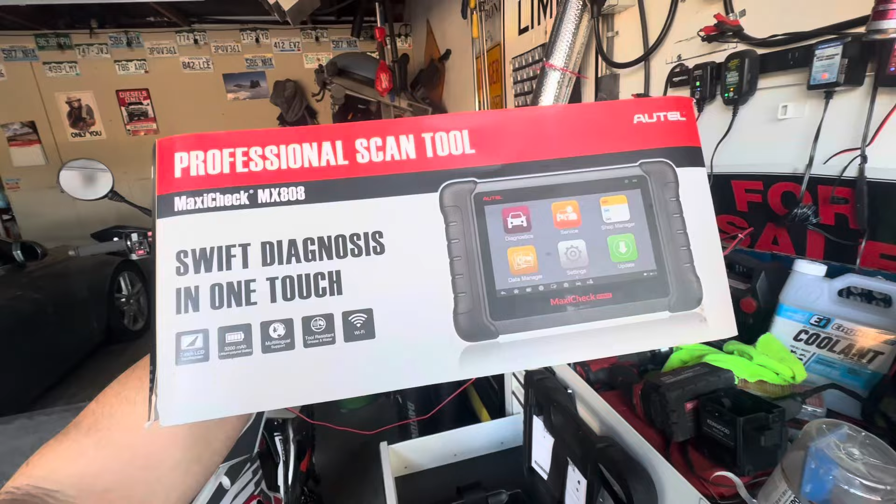This is not a video about the car, but anyway, I was just letting you know, if you have one of these cars and one of these scan tools, you can go in and change your service mileage, so you don't have to have the warning come on.

At 7,500 miles, after you've used it for 7,500 miles, you can drop it down to whatever you want. You can do it every 1,000 miles if you're driving race cars, or you got it souped up, or you got a big turbo on it and want to change the oil sooner. You can go in there with that scan tool and set it.

So it's pretty cool. Kid bought that scan tool for me, I don't know, about 5 years ago, or maybe even more.

Anyway, video is about pulled pork. Man, we didn't get to eat till dang near 10 o'clock last night. Just couldn't get the heat going, the heat just wouldn't stay, it stalled out on me.

Sorry, I went into a guy at work's voice. Anyway, it was just super windy. I think even still the wind was pulling the heat, it just stalled out on me, so I ended up turning it up to 300 degrees.

It hardened the outside way too much, almost kind of burnt it, but the inside was delicioso. Anyways, it was good regardless.

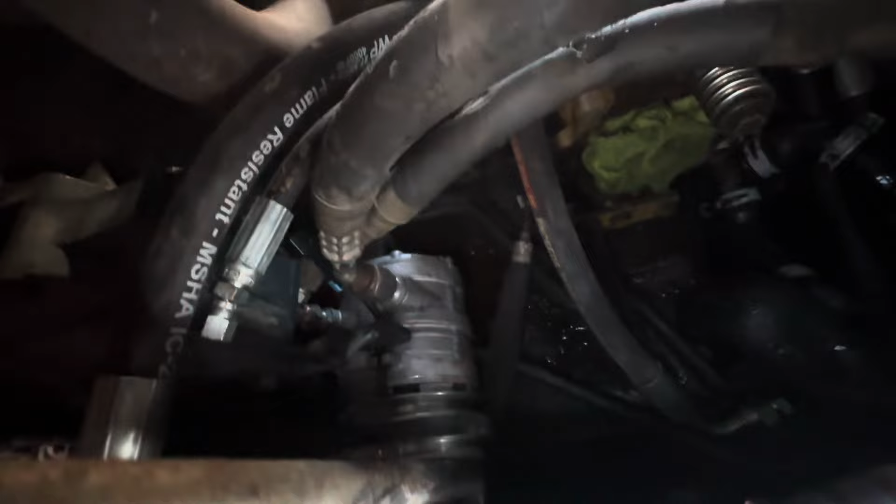Okay, so it's gonna be hard to see in here, but we got the pump out. I got pretty much all the lines capped off with a cap kit, other than the fuel. That's a fuel return line.

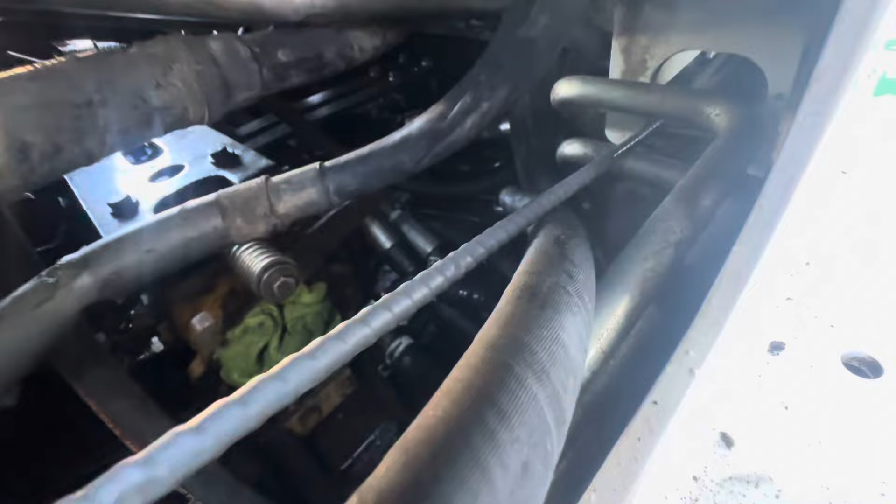That was not fun. I do have a plan to get it in a lot easier than it took to take it out, so I'll show you guys that at the pump. I wish I would have done it, so if I have to do this again. The most difficult part is the clamps, the stupid hose clamps that are dumb.

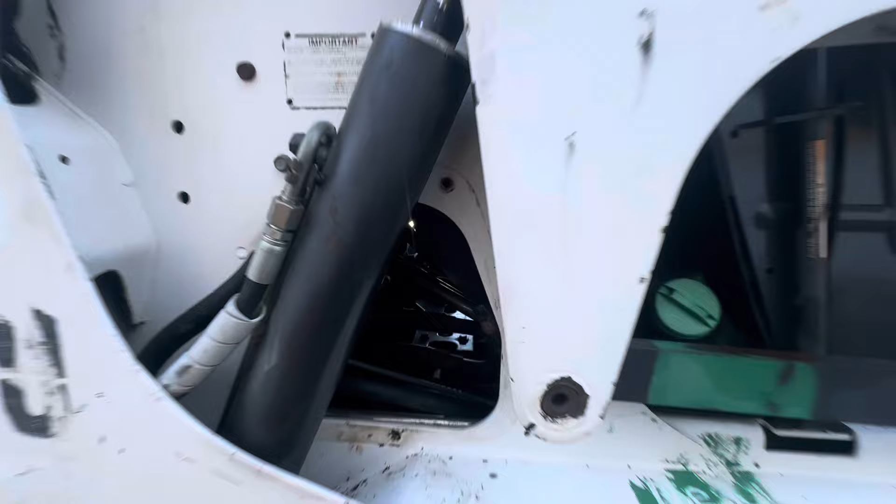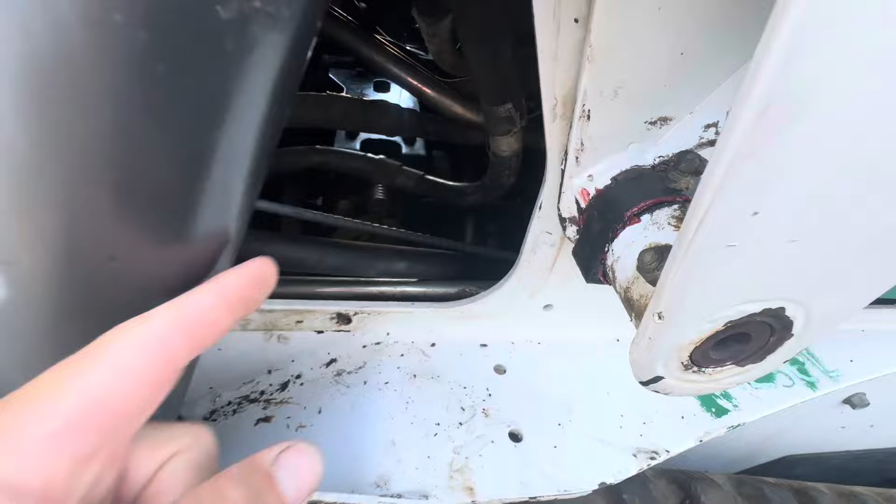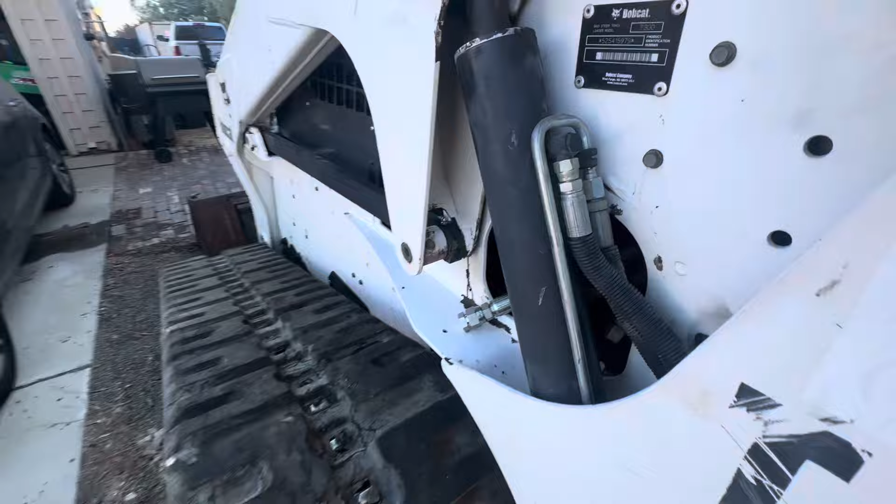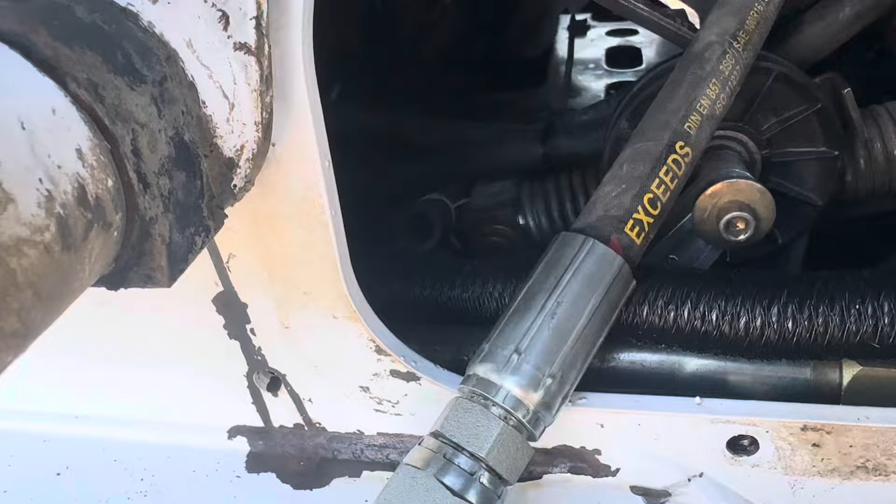I did reroute the heater hoses up there. I rerouted them over there because whoever worked on it before had them going down here and then up. But I think I'm gonna have to get new hose because there's some worn stuff on it. As you can see, I got that cap on there, got that cap on that hose, and there's a cap on the other side of the hose. I don't remember what that hose is for.

Anyway, yeah, not fun, not fun at all. But I did find chunks. I think I already did a video of all the chunks, but let's go over here.

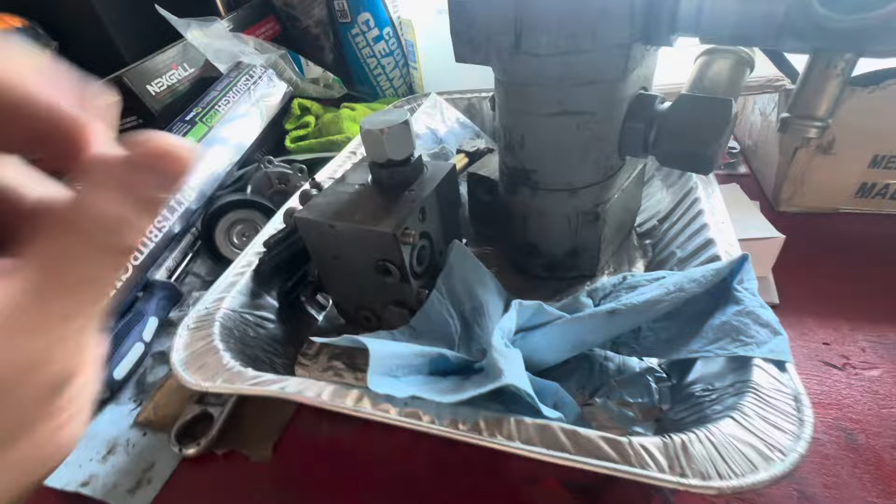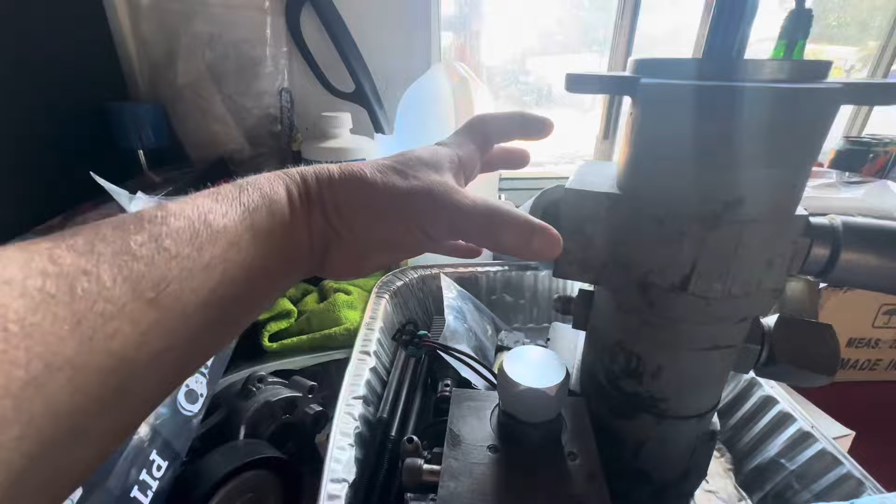So basically this is the pump, and then this is the front attachment block. Now that I know this comes off, this pump will go in a lot easier because I could throw the pump in and bolt it in, because one of these bolts sits behind this block and you only get a quarter turn at a time. So now I could just throw it in and do all that.

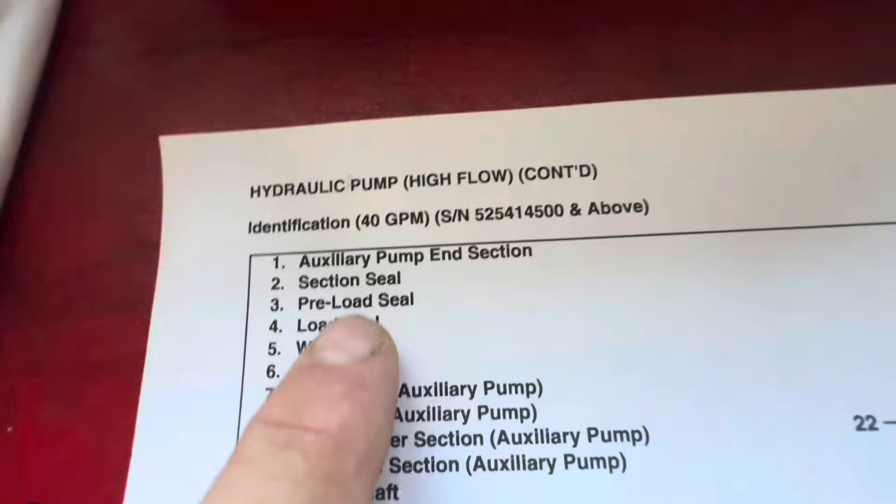So I was trying to order this pump. It's a high flow, 40 gallon per minute. That's the serial number of the machine and above.

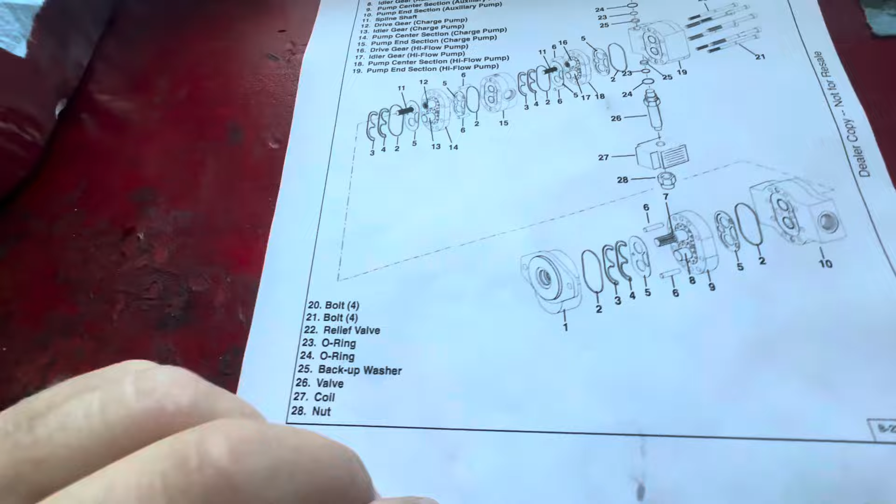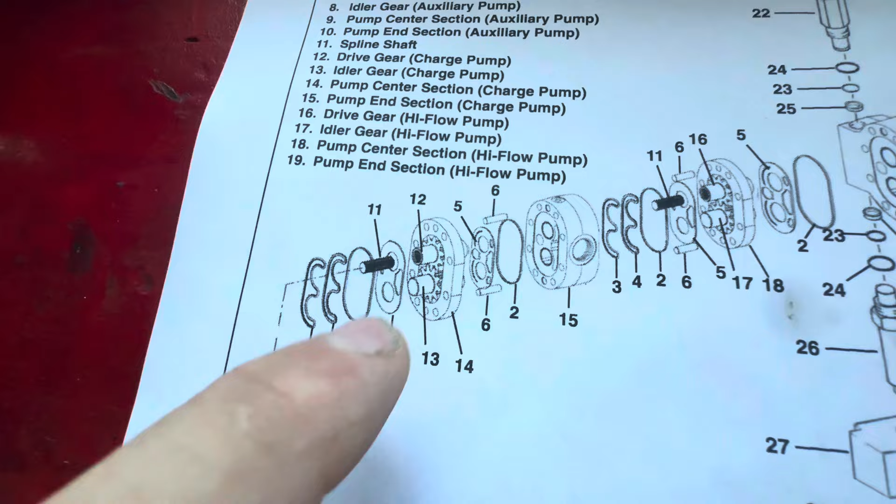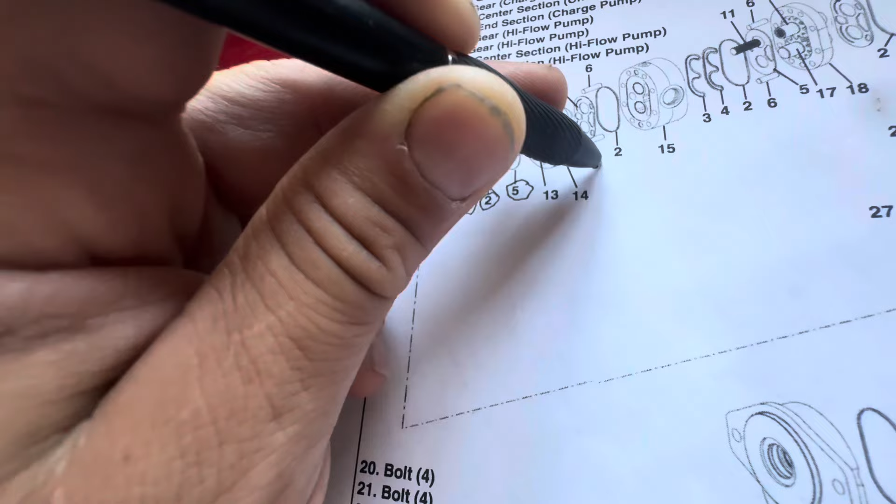Basically what I'm trying to order is 14, which is this whole piece, not the gears, 5, 6. I wish I had a highlighter, but so I'm trying to order this. This is gonna be left-handed. 3, 4, 2, 5.

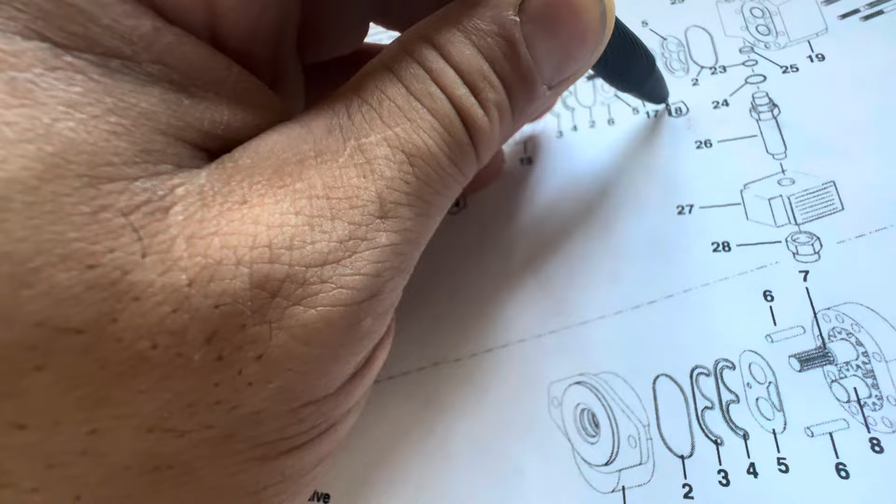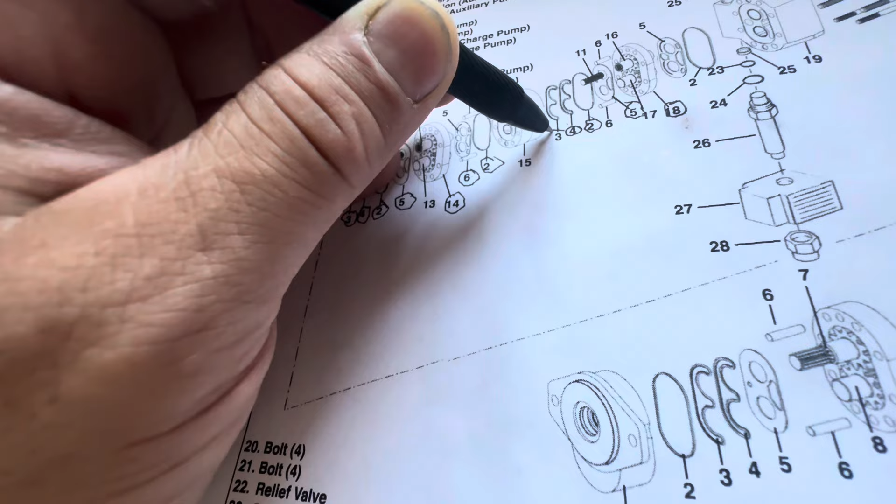6, 2, 14, 18, another 5 - those are good - another 2, another 4, another 3, 5. And I'll tell you guys how much this is, how much money this is.

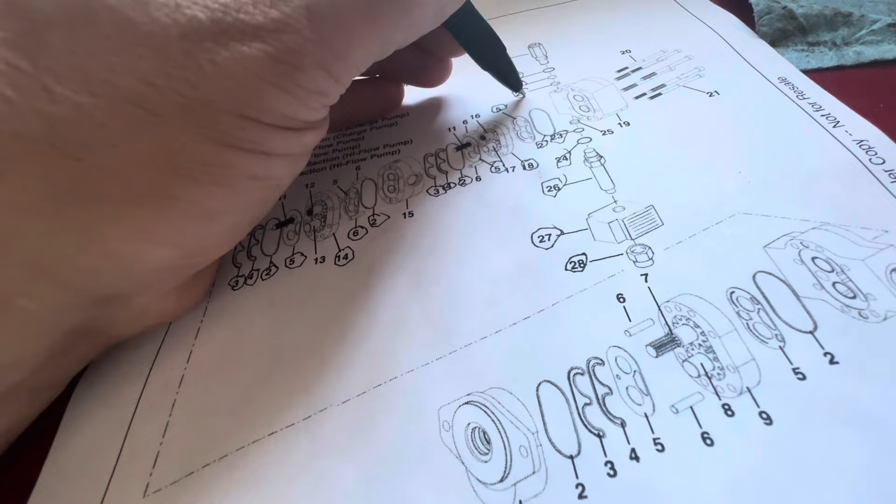So O-ring, O-ring, this piece, this piece, this piece. I'll give you the breakdown of what stuff costs, and then...

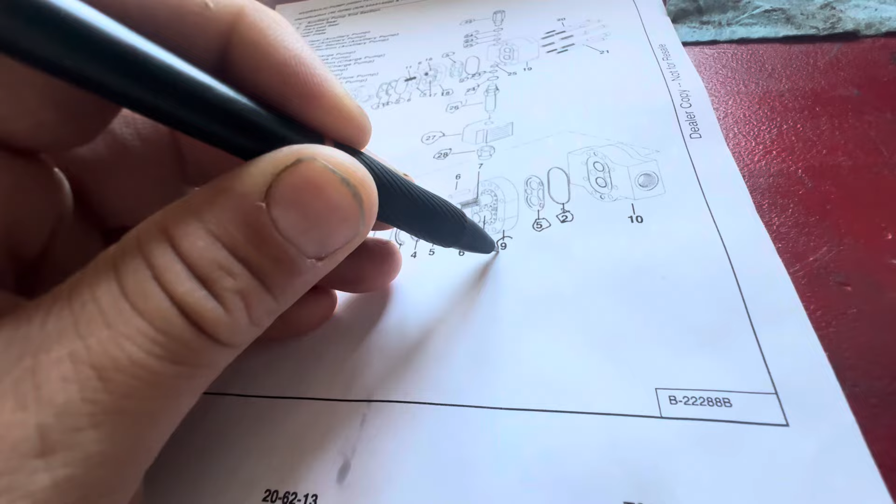What a rebuilt unit costs - I mean, what it cost me, because that's what I ended up doing. I ended up purchasing a remanufactured unit. So these pieces here, that one, that one, that one, you can get 2 of these.

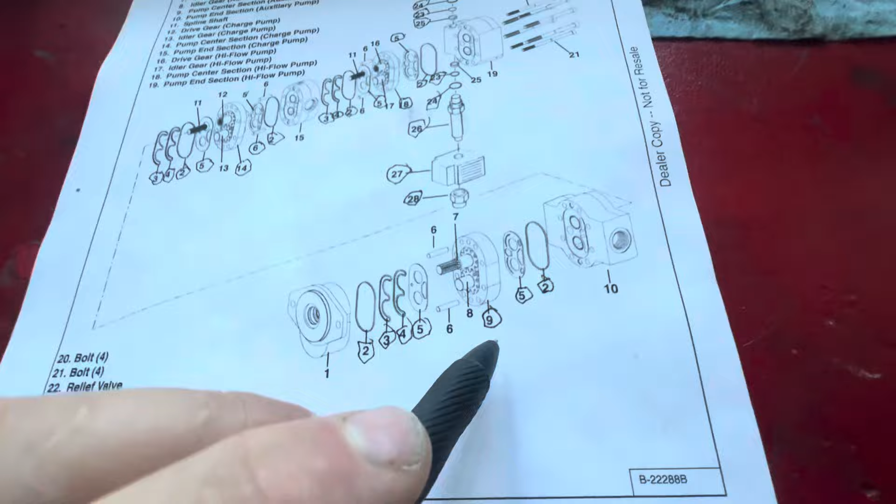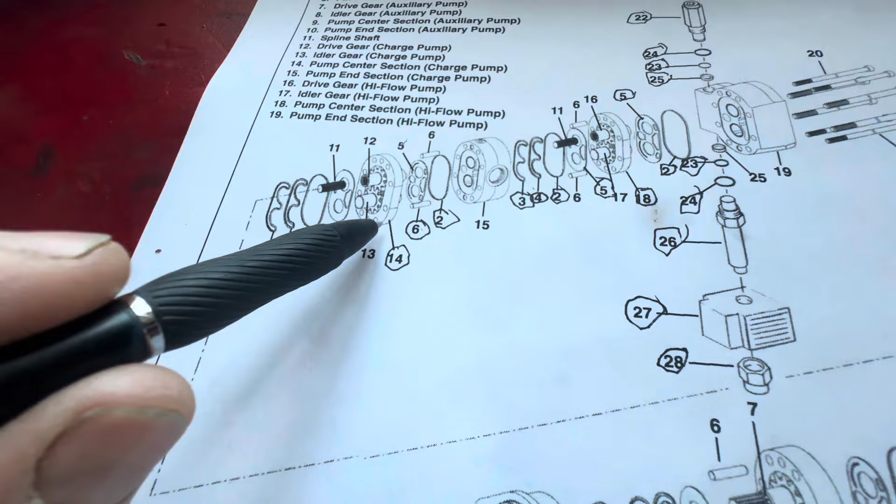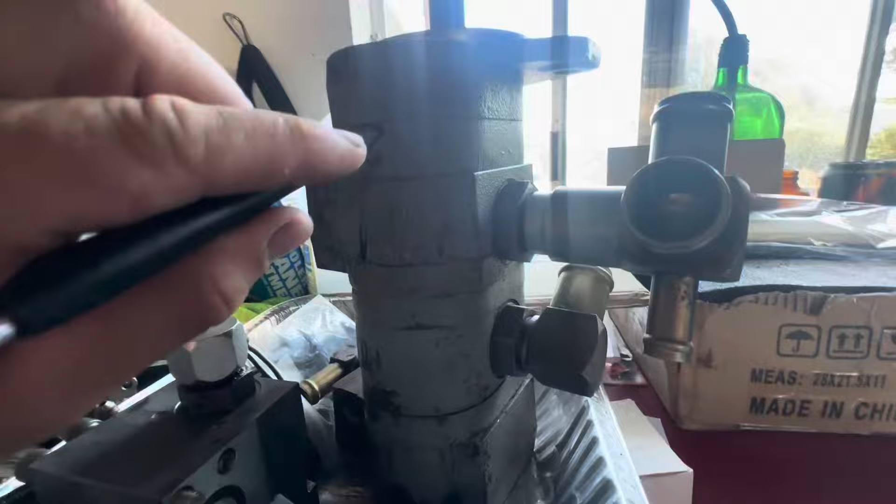I don't know which 2, I think it's this one and this one you can get. I don't think you can get that one. I called like 3 different places yesterday, spoke to about 5 different guys, and they don't know this part number because they're all different thicknesses - it goes thick, thin, and thinner.

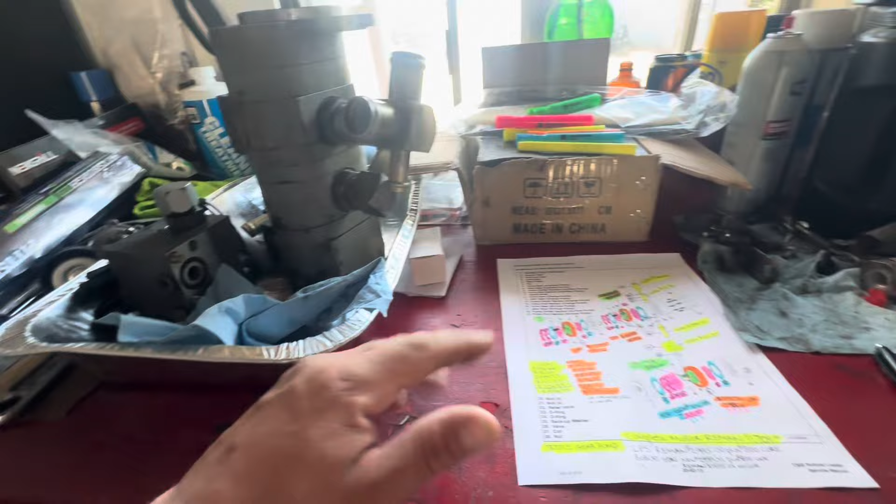Alright, sorry guys, I was interrupted, but yeah, so I'm going to do a breakdown of this. I did order a new pump, and I'll go over this with you guys in the next video, because it's gonna be a lot.